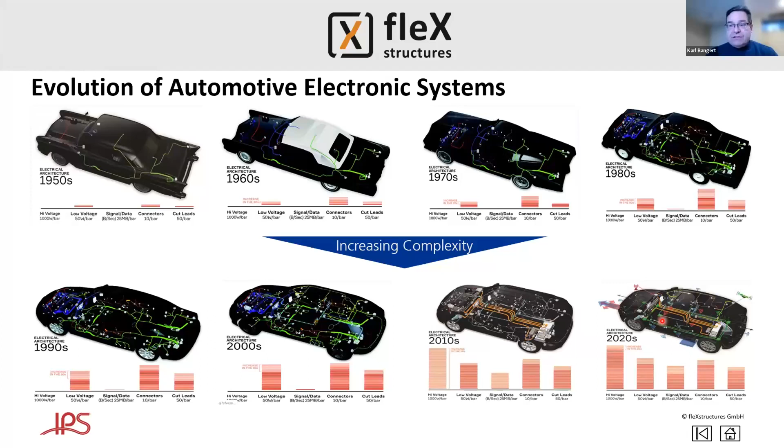And really the motivation for this, as you've seen if you're from the Southeast Michigan area, but really you're seeing this in products all around, is the advanced electrification and complexity of transportation systems. We've gone from a few feet of cable in cars to miles, actually miles of cable and wiring, along with an increase in the number of sensors and software needed to control these advanced vehicles. And as we move toward self-driving and so forth, it will only increase. The OEMs, as well as new upstarts in the electric vehicle market, are seeing this as the future. Everyone's in. Our Detroit 3, as well as companies throughout the world.

And this presents a challenge because managing this increased complexity is difficult if you wish to get vehicles out in a timely manner. So what we're going to discuss today is we're going to reference really some of the success that our clients have had in taking the traditional physical prototyping approach, where you've got to create a mock-up of assembly, let's say a front suspension of a car and the brake hoses and sensor cables and so forth, try to figure out where everything goes, and really get it to where these historical test labs are nearly empty, because you can do what you need to do in the virtual space, a combination of virtual product development together with

process virtualization. We have an example here of our good clients at BMW, who, in yellow, laid out some cables and hoses on a front suspension in 2015. And when they checked on what was rolling off the line, 3 years later, they were within millimeters of what they'd initially designed. This is a major accomplishment because there are so many variables, so many things that can change as you go along, that can lead to big problems as you get ready to assemble a product. And having these challenges in grasp this early in the product development cycle is a time and money savings.

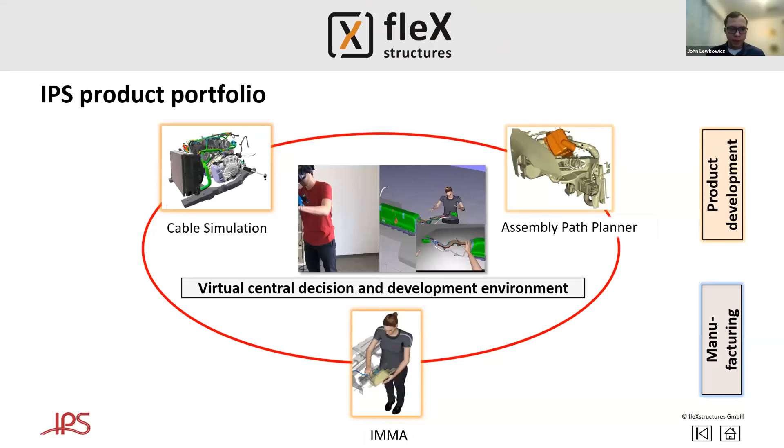And in the interest of bandwidth, I am going to turn off my video and share my screen.

All right. So beginning with cable simulation, we're going to go through a basic example here where we're going to try to analyze and optimize this brake line on this front corner suspension assembly here. As we go through this process, I do want you to keep in mind that this methodology and the way that the tools work really applies to any kind of flexible component. So whether that's a single wire, a multi-branch wire harness, a cable, a tube, even things like preformed cables. So if you have something that's pre-bent into some configuration, the methodology is really the same and applies to all flexible components.

So to begin here, we've just imported in some CAD data, either from our CAD system, or we have seen direct connections between PLM systems and IPS. So we've seen direct connections between Teamcenter as well as Creo View through Windchill if you're using the PTC solution. You can also just bring CAD in directly from your CAD system. So we're compatible with a number of different 3D CAD formats, including JT, CATIA formats, STL, and VRML. I would like to mention here as well that we do have the capability to import point cloud data into the system very easily. So if that is something that's of interest, it's very easily done in the IPS tool.

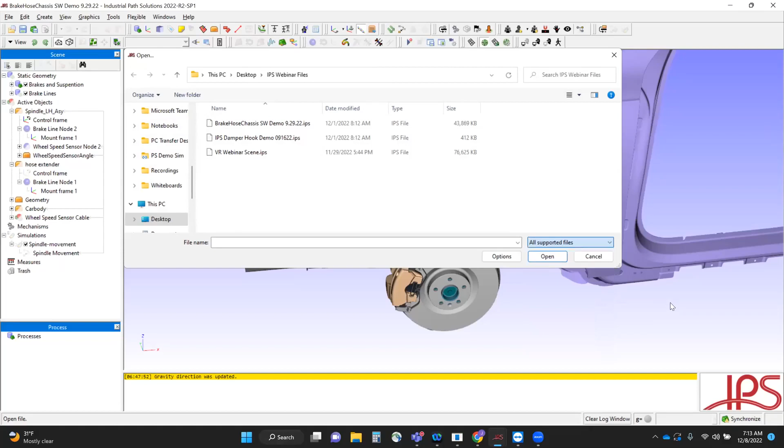All right, so we have imported in some data here. And we can directly design our flexibles in the IPS tool from scratch. Or if we already have some pre-existing CAD geometry, such as this brake line coming out of our CAD system, we can simply take this information, make this just dumb CAD flexible, do our analysis and optimization, and then at the end, we'll see how we can actually feed that data back into our CAD or PLM system.

So for our brake line here, I would like to make this cable flexible. So I'm just going to use a tool here called the Cable Finder to automatically find the geometry of this cable and make it flexible. So you can see the software very quickly has identified the center line as well as these cross sections going along the length of the brake line here.

Very important to note, again, that we can simulate straight cables. So basically anything that would be straight when unloaded, but we can also simulate preformed cables. So if you have something like a coolant tube or a rigid brake line or something that is pre-bent into some configuration prior to installation, we can also handle those kinds of flexibles as well.

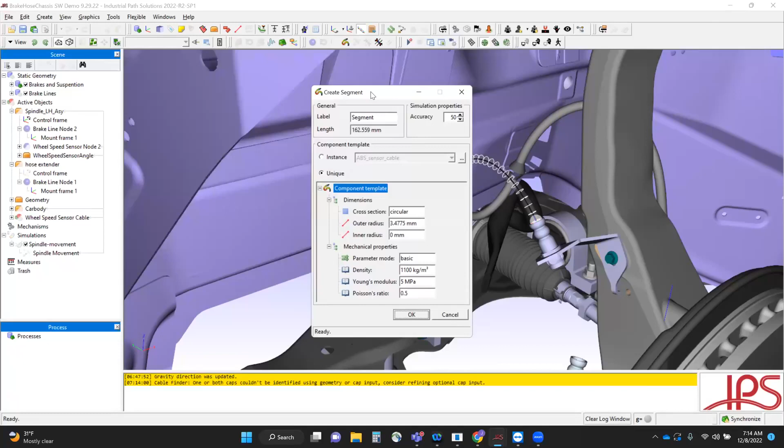Now, very importantly, we need to specify some of the material properties for this particular cable. So there's a few ways of doing this. We can directly input those values ourselves, or in this case, I'll just use the library of cables and hoses that comes with the IPS tool and identify this brake line as an 8mm brake hose. And I will hit OK. And we can see here that we have successfully created our flexible in IPS.

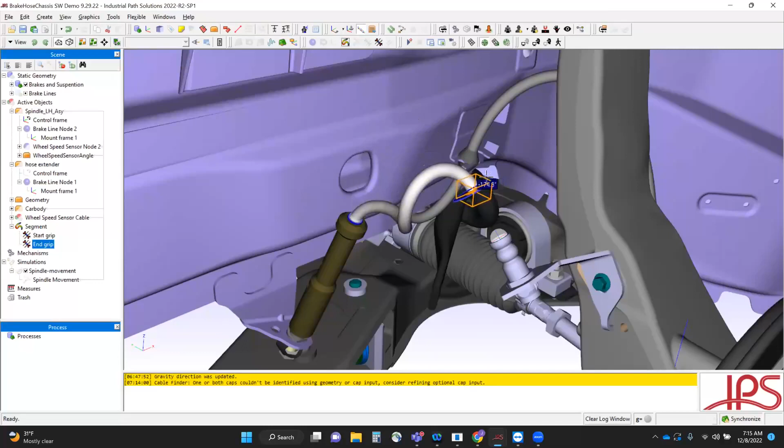Keep in mind that the software is very interactive and very fast. So as I move the end of the cable around, or if I were to apply some torsion to the end of this flexible, interestingly, we see that the cable is behaving based on its very specific material properties. So for this brake line in particular, it's very torsionally stiff. So if we apply torsion, the cable immediately goes into bending. So the software is highly, highly interactive and fast.

Now we do have a motion in here for our spindle assembly, our wheel assembly, and we can either directly create these motions in the IPS tool, or if we have some pre-existing motion coming out of our CAD system, we can absolutely import those things into IPS and link them together very easily. That would include things, even if it's a very complex, multi-link kinematic mechanism, the software can handle those as well.

So I'm just going to attach my cable to our spindle assembly here, and then just unwind it to make sure we're starting with a torsion-free solution. And if I play my motion again, we can see this cable moving along with our assembly. So beyond just being able to observe these things in the tool, we have a number of very powerful analysis and optimization tools built into the IPS suite.

So for instance, we could create a visualization on this cable, essentially a color map, right? And we can look at things like stripes to take a look at torsion in the cable. We can look at any number of different forces, moment stresses. But in this case, let's take a look at the bending radius. And then we can customize this color map for whatever our particular design requirements are.

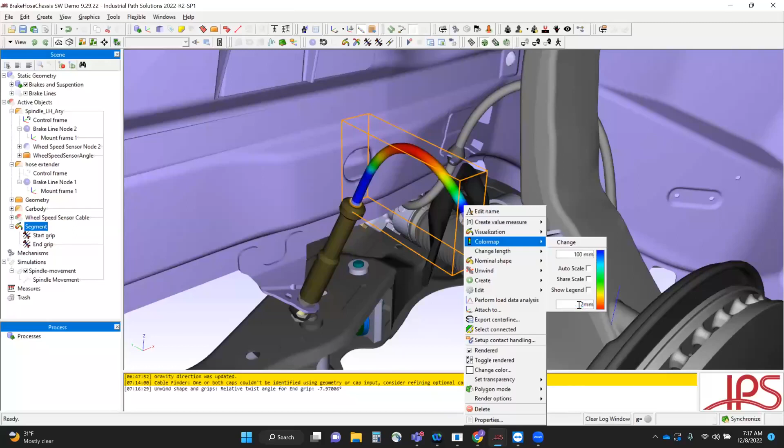So in this case, let's say that bending radius of 100 millimeters is really good. And our absolute minimum is a bending radius of 25 millimeters. If I play through the motion again, we can see this cable and this color map reacting in real time.

We can also directly take measurements of values on the cable. So I can create a value measure on this cable. Again, looking at things like elongation, contact forces, any number of different forces, moment stresses. And again, we'll just take a look at the bending radius here.

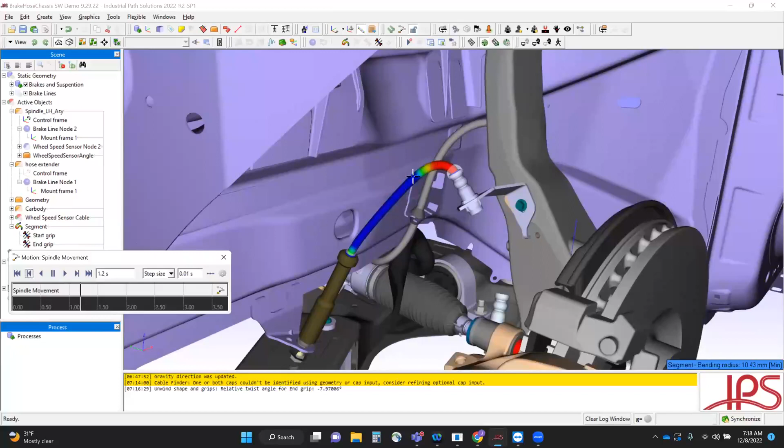1 second. So again, if I play through this motion, these values are tracked in real time, and we can directly observe those values in the bottom right-hand corner of the screen here. Now you'll notice it's pretty obvious that we're overstretching this cable, that it's far too short, and that this bending radius is going very low as the vehicle is in operation.

So in the IPS tool, we can very quickly and easily make changes to our flexible designs. For instance, I can very easily change the length of this flexible, right? Just with these up or down arrows, or I could type in some specific value, and we can see that this is improving our minimum bend radius condition here.

We also have a number of powerful analysis tools to actually look at how those values are behaving over the course of this motion. So I could create a plot here of my bending radius over time to see how those values are changing as the vehicle is in operation. So we can see that I now have a graph showing my bending radius, and I can drag through and see how those values are changing over time.

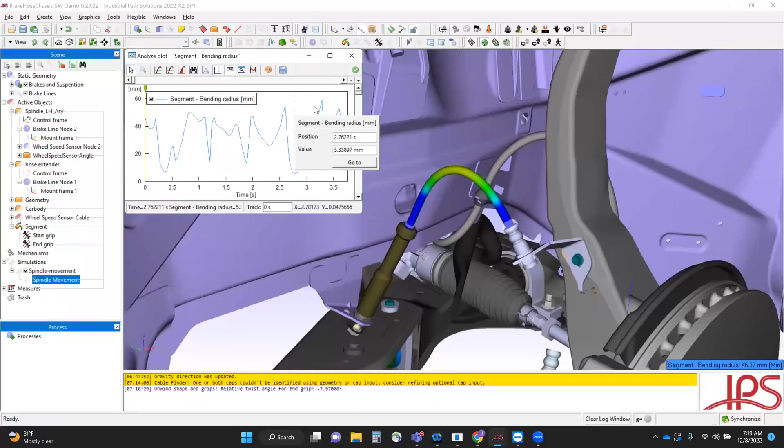We can also do things like search for global or local maxima and minima, or specific values. So in this case, we want to make sure we're staying above some minimum bending radius threshold. So I'm going to search for the global minimum bending radius. And if I click find, we can see that the software has identified this exact point for us on the graph. We can see when this is occurring, and that our absolute minimum bending radius value is about 5.3 millimeters. So that is very well below our design requirement of a minimum of 25 millimeters.

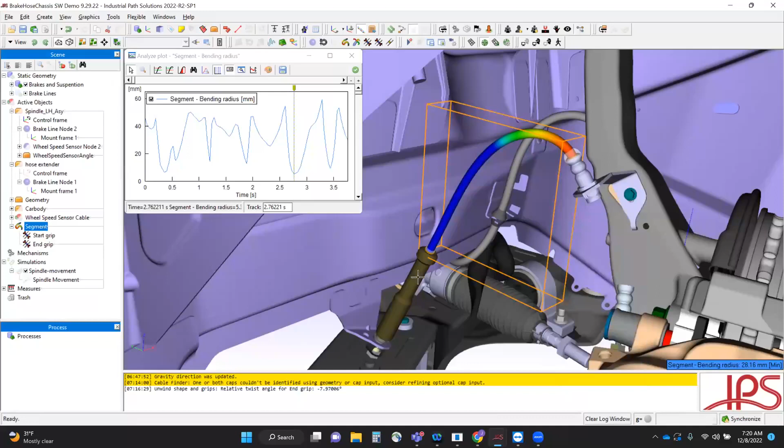And I can jump the simulation directly to that point. And now if I optimize in this very worst case scenario, we should be able to be confident that our cable is going to stay above that value throughout the entire motion. So to do so, I'm just going to right click and change the length of the cable. And again, we can see that value changing in the bottom right-hand corner of the screen. So let's get above. At about a length of around 220 millimeters, our minimum bending radius in this very worst case scenario is above our minimum of 25. So if we like these changes that we've made, I can just click this green check mark, and those changes will be saved in the simulation.

Now playing back through my motion, we can see that this longer length has improved our bending radius, but this could also create some other concerns, right? So this increase in length may have reduced some of our clearances to some other surrounding components. So we can also take a look at things like distance measures between cables or rigid bodies in the software.

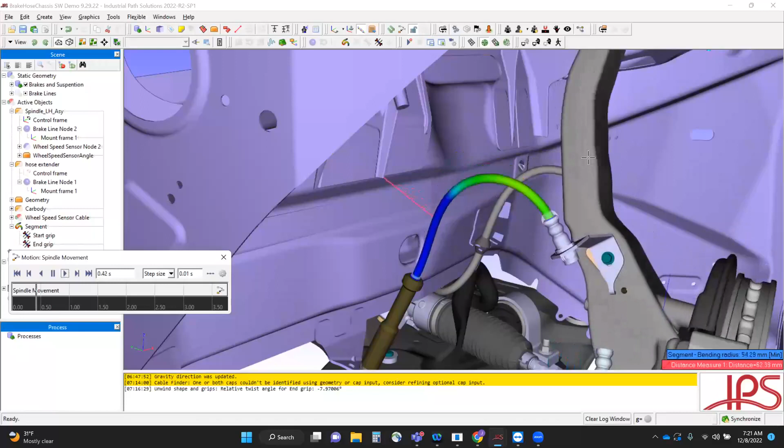So for instance, if I were concerned about my clearance from our brake line here to, let's say, this piece of geometry, I can create a distance measure and just tell the software what I want it to measure from and what I want it to measure to. So in this case, this component here. And again, all of these values that we're tracking will show up in the bottom right-hand corner of the screen here, and they are all tracked in real time, very interactively as we make changes to our routings and our designs.

Similar to what we did for the bending radius, we can create an analysis, a plot of both of these values now. So our distance as well as our bending radius, to make sure that whatever our design criteria are, they're being met. So now we'll have two plots here. And firstly, I want to make sure that my bending radius is staying above that minimum value. So I'll just search for the global minimum. Find that point. We can see our very worst case bending radius is above our minimum. So that's good.

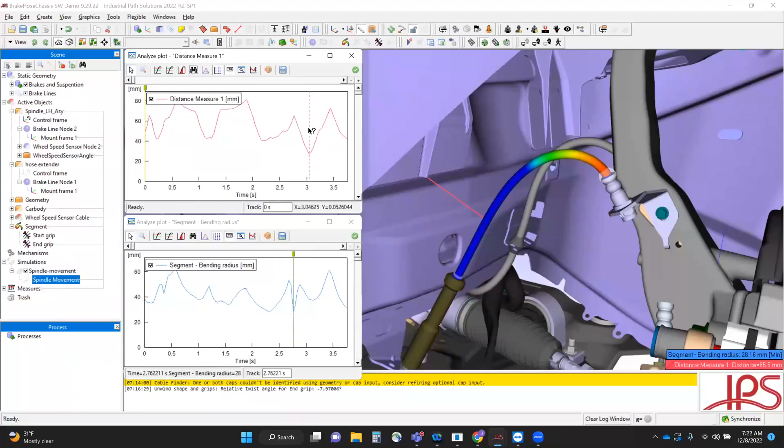And now let me take a look at the distance measure. And this is going to be our very worst case clearance condition. So if I jump to that point, we can see that's a value of about 27 millimeters. And in this case, that should be plenty of clearance. So we can conclude that we have successfully optimized our brake line here.

Now the question is, what do we do with this information? So we've done some work, some design work in IPS. And obviously, we want to feed this information back to other designers, back into our CAD or PLM system, so that everyone can utilize this design. So we have several ways of doing this in IPS. Firstly, we are able to just export the center line of this cable. So again, we can send that out of the software in IGES, CGR, JT, STL, or VRML formats.

We could also capture the 3D geometry of this cable in some particular static position. And we also have the capability to create motion volumes, right? So actually capturing all of the design space that this cable is going to move through as the vehicle is in operation.

So if we create a motion volume here, I just need to tell the software what I want it to track over the motion. So I just want to take a look at my one cable here. And then I'm going to change my settings a bit in the interest of time. And this again will generate a swept volume that's going to capture all of the design space that the cable is passing through. And we can export it out in any of those formats mentioned previously, so that you can bring it back into your CAD or PLM system and really allocate that design space.

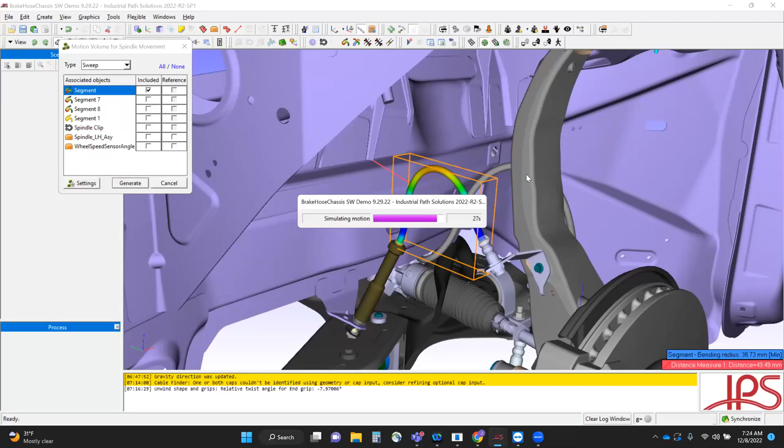So we can see our motion volume here. And I'm just going to change the color and transparency a bit so we can take a look at how our cable is moving through this space. So very easy to feed these changes back to any other systems you may be using.

Another thing that's very interesting here is thus far we've been really taking a look at this cable with all of its nominal characteristics, right? So we're looking at it with the nominal length, nominal fixation points, nominal material properties, but we can also allow any of those things to vary in the tool and create tolerance envelopes that show how any of that variance would affect the design.

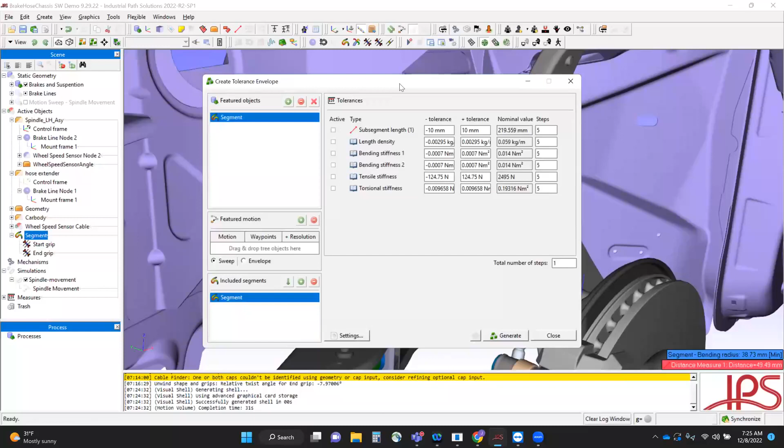So I'm going to pull up the tolerance envelope tool here. And you can see that we can allow any number of things to vary. So we could allow the fixation points to vary either in position or orientation, length, material properties, and we can do this with or without a motion.

So just as a simple example, if I were to allow this cable here to vary in length, let's say plus or minus 10 millimeters, I can generate this volume and you can see all of that design space captured. And again, we can very easily export these things out to feed them back into any other systems that they may be needed in. And that concludes the cable simulation portion of the demonstration.

Great, thank you very much for that, John. That is impressive, especially being able, as you mentioned, to take the CAD data that you've used in IPS, bring it back into your CAD system as part of the product development workflow. A couple of questions have come up. You'd mentioned cable and hose properties. How are these determined? Is there a library of data that you may be able to reference?

Yeah, absolutely. Great question. So the tool does come with a library of predefined cables and hoses that you're more than welcome to use. And there are several other ways we can define material properties in IPS. So we can use basic parameters, right, which would just be density, Young's modulus, Poisson ratio. And this assumes basically a homogeneous material throughout your flexible. We also offer through our partners in Germany testing services. So they've developed a tool called the Mesomics test bench.

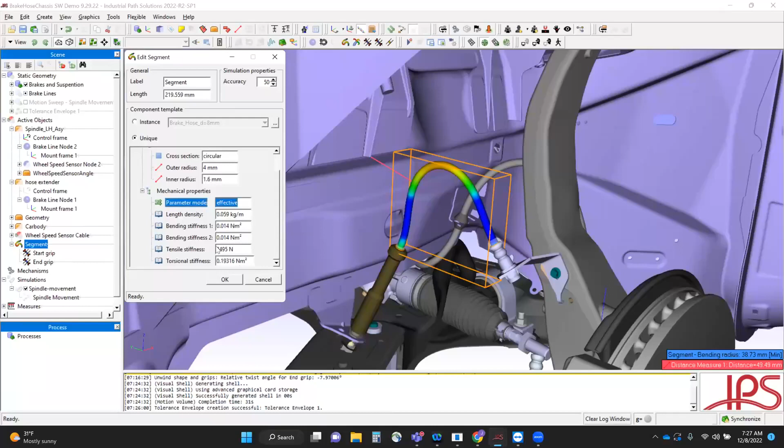In many cases, these basic parameters are plenty good for getting an idea of how your flexible is going to behave. But if you're doing a really critical application and you need a really in-depth look at internal forces, just a more robust study, we can send those flexibles out for testing to determine exactly what these effective material parameters are through our partners in Germany.

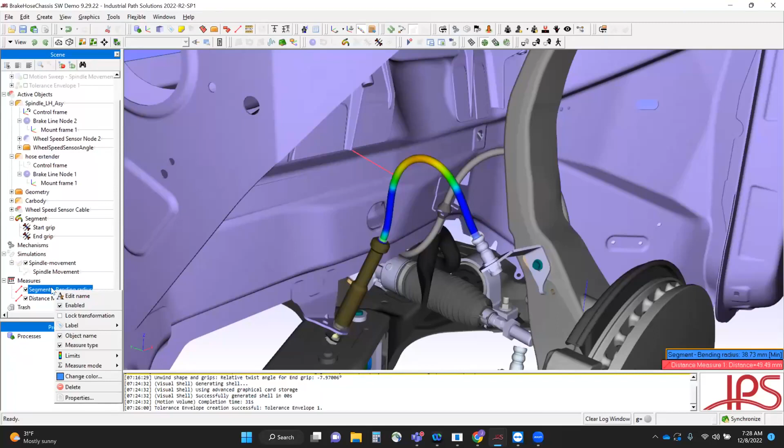Great, thanks, John. Another question has come in as to, is there a force element as an output to understand how much force is acting on the cable? You've identified a number of measures. Yes, please go on. Absolutely, yes. So any of these value measures that we've created, which keep in mind, there's a wide variety that we can track on the cable, we can absolutely output those and send that data into some other system by creating one of those analysis plots, right?

So if I create a plot, let's say for my bending radius, just as an example, I could send that information out either just as the graph in an image format, or we also have the ability to save this out in a CSV file that could then be used in any other engineering tools you may want to bring that data into.

That's great, John. And when you say the force, that's forces on the cables as well as on the connectors or fittings or what have you, right? Yes, absolutely.

Great. Well, with that, I think it looks like we're wrapped up with the cable simulation portion. I'll keep the mic on you, the spotlight on you to talk about path planning. Awesome. Thanks, Carl.

Yeah, so moving on to the Path Planner tool in the IPS toolkit. This is a solution that allows us to find collision-free installation paths for essentially anything. So those could be components in assembly. They could be pieces of tooling. So in this case, we're going to take a look at this damper, this hook style lift assist that's trying to pick this engine damper out of a dunnage tray.

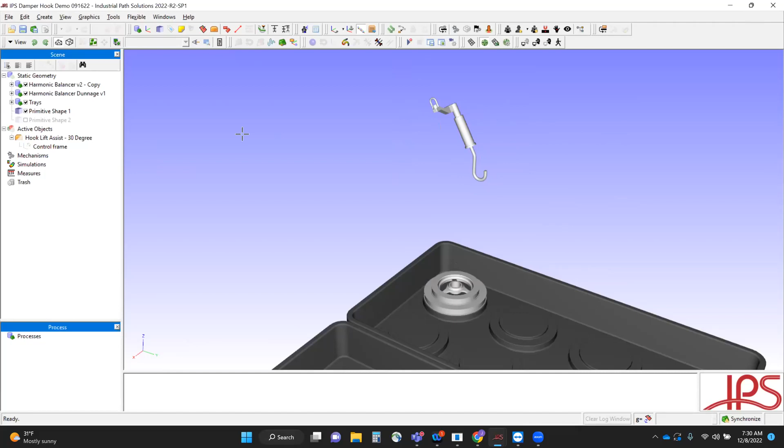But if you have something and you want to find a collision-free path from position A to position B, the software can absolutely do that for you. It is extremely easy to use. Essentially, we just tell the software where to start, where to end, and what to avoid on its way from point A to point B, and the software will do the rest.

So if I select my damper hook, and I'm just going to open up the rigid body path planning tool, I'll set this position as the start, and then I'm going to jump my hook into the final position, where it's actually hooked into this spoke on the damper, which is where we'll begin pulling it out of the tray. And I can set that position as my goal.

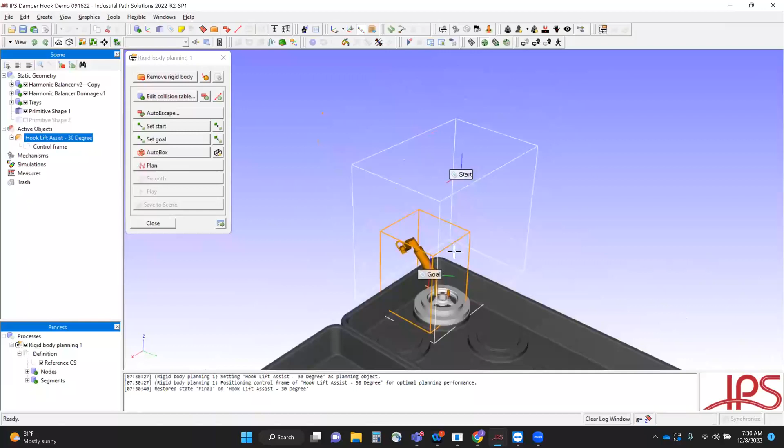Give the software an area to try to find a collision-free solution in. So you can see this box here that it's identified for me automatically. And then just click plan. And the calculation times can vary depending on the complexity of the installation path and how small the clearances are. But you can see that the software just found this installation path in about 6 seconds.

So this is a very unique tool, very different from other simulation tools we see, where you have to manually manipulate each of the points along this installation path. So IPS is going to do all of this automatically for you. So now if I open up my motion here, and I'll slow it down a bit and click play, we can see our hook moving from that initial position into the final position.

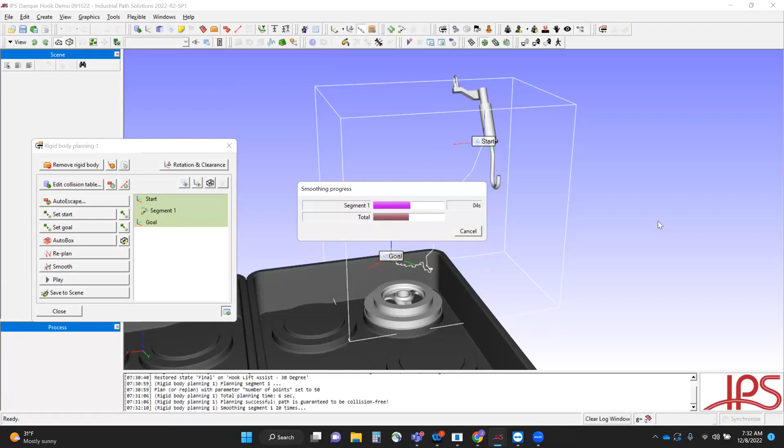Now, one thing you may note here is that this path looks quite unrealistic to how an operator may perform this task. But keep in mind that this is just the initial solution. So within the Path Planner tool, I can smooth this motion. So let's say I'll smooth it 20 times to create a more realistic installation path that can then be used in conjunction with our IMMA, our dynamic human modeling tool.

So if I open my motion up again here and I'll slow it down, we'll see a much smoother, more realistic installation, similar to how an operator would probably actually perform this task. And again, this is all done automatically and very quickly.

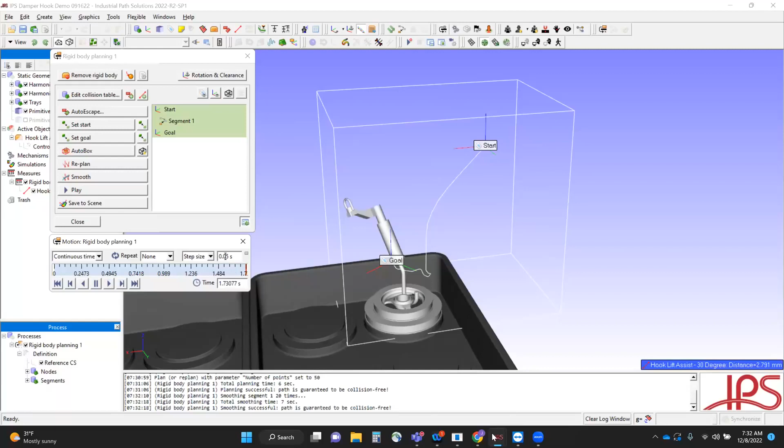One other thing I'd like to mention here is that we also have the ability to create things like collision tests and distance measures. So I'll create a distance measure here, and we'll see our minimal distance tracked in real time, just as all of our other value measures were for the cable simulation. And we can see what that minimal clearance value is throughout the entire motion.

Once I'm happy with the path that I've created, all I have to do is click Save to Scene. And now this installation path is available to use with any of the other simulation tools in the IPS suite. And that concludes the Path Planner portion of the demonstration. It's quite simple to use.

Thank you, John. Hey, we have a question from our participants, which is how can I exclude parts within the Path Planner that are barely touching? You mentioned collision detection. Yeah. So there's a few ways to do this. If you are actually in collision in your final position, right, your final installation position, there is a tool built right into the rigid body Path Planner that is called Auto Escape.

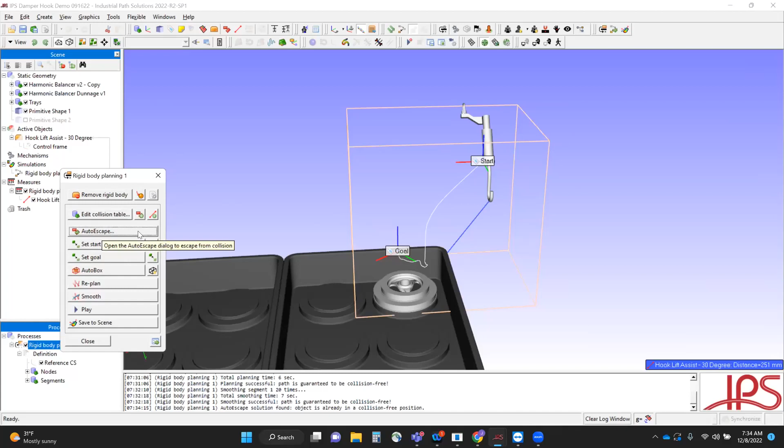So you can use this to try to find a position where it's just barely out of collision to get your final installation position. The other thing we'll often do is just kind of barely pull it out of collision, right? So we could look at something like this distance measure and use that to get an idea of how close we are to some other component.

Or let me open this back up. We can very easily create a collision test. So you can see that also popped up in the bottom right-hand corner of the screen. And then this will identify when we are in collision with these components. And there are a couple of different settings for this. So let me just edit my collision test. Right now, it's just highlighting anything that's in collision.

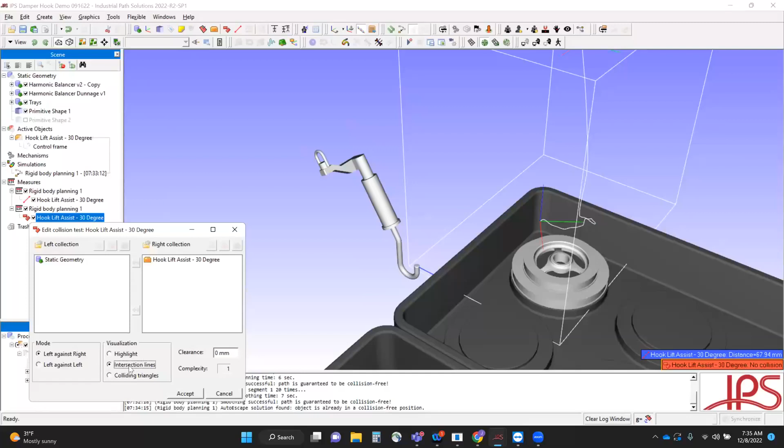But what may be more interesting is we can take a look at intersection lines or colliding triangles, which will give you a really good idea of where it's actually colliding. So let me change the transparency on this tray so we can get a better sense. And you can see where that collision is occurring exactly. So if we had two components that were barely in collision, we can use these tools to identify where that's actually occurring and try to move it into a position where it's just barely not touching.

I should mention here also, this is an interesting feature. You can also capture this geometry just by right-clicking on the collision test. And now I've captured these lines of where this collision is occurring, so we can export this out and feed it back into like a CAD system or somewhere else that this information may be useful.

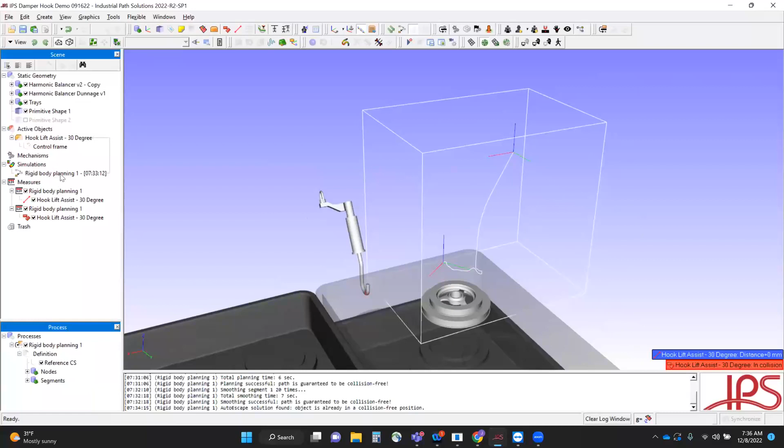Great, John. It looks like that provides a lot of information that is actionable for solving a problem like this. Another question that's come in is: we're working with tooling, but what if we wanted to install the damper on a vehicle, or if we wanted to find a path that the trolley with the dunnages is going to take through a plant floor? Are those all things that can be analyzed with Path Planner?

Absolutely. So any two components or any two objects, items, if you want, just going from point A to point B, the software will find a solution to get between those. And the other thing to mention here is that we have a very wide array of settings and options within the tool to really optimize whatever our path is. So we can tell the software to prioritize avoiding obstacles or trying to find a very short path. We can have it prioritize rotation or translation.

And we can even do things like constrain the path along certain axes, right? So in the example you provided with a trolley, we would constrain that to the floor plane, the XY plane, and not allow it to move in Z. And the software would absolutely find a path along the floor from point A to point B.

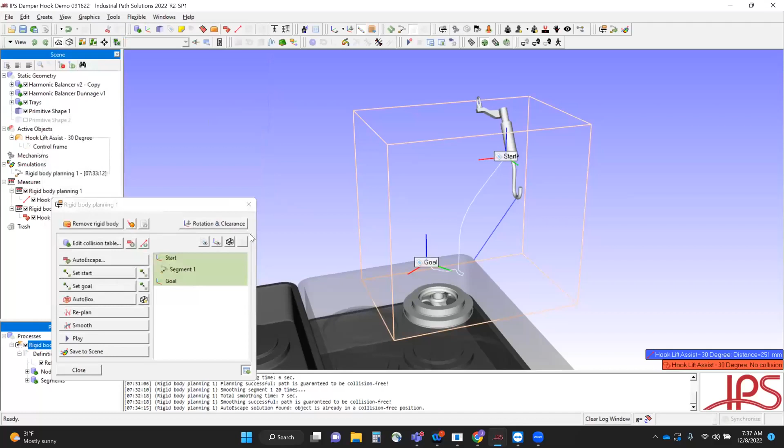Excellent, very good. And I see another question: what if it can't be done? How does Path Planner handle unsolvable paths? Yes, so that is a great question. Typically, I'll allow the software to run for maybe a minute, and if it doesn't find a solution, I can increase the calculation time to allow it to run for as long as it is required to find the path. So very worst case, you could allow it to run for a few hours while you go and work on something else.

But I will say that it will not necessarily tell you that you cannot go along some path or that no installation is possible whatsoever, simply due to the fact that there are an infinite number of potential paths to try, right? But for instance, if we were to take a look at a plot of our clearances here between the hook and the damper, we're talking about sub-millimeter clearances on this installation path that it found in 7 seconds.

So if the tool is really struggling for a long time to find a path, if it were feasible, it's going to be such minimal clearances that it's probably not realistic, right? So if there is a way to get from point A to point B, the tool will find it. If there is not, it will not explicitly tell you that, but you can sort of infer based on the amount of calculation time.

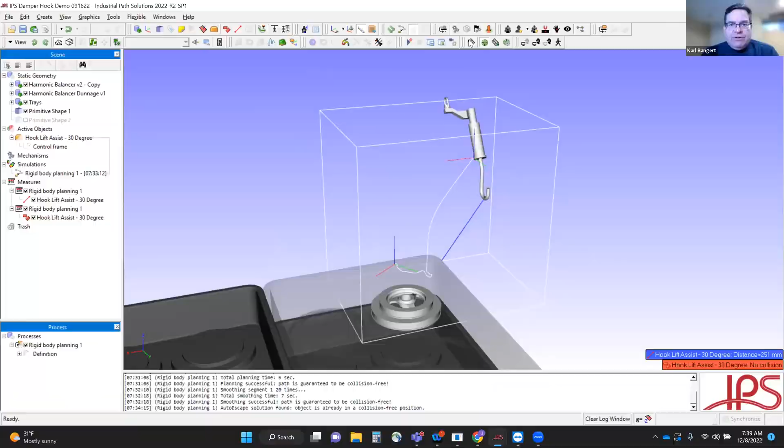Great, thanks a lot, John. With that, I'll turn the mic over to Karl to talk about IMMA, our intelligently moving manikin, and how that fits into what we're doing with process virtualization and ergonomics.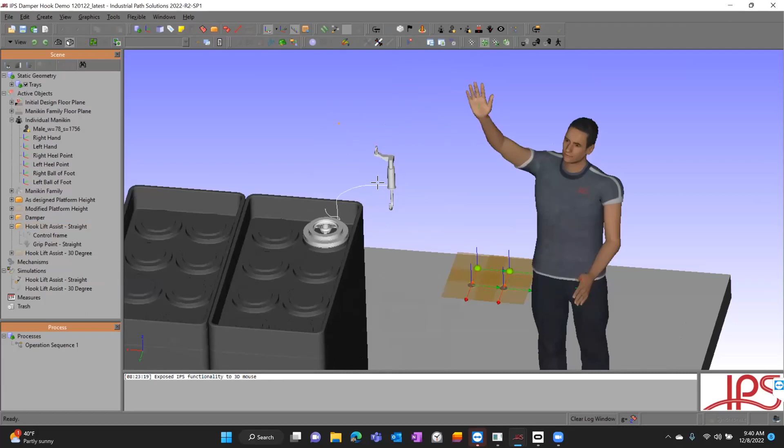So what we have here is a module that's called IMMA, and really the purpose of IMMA is to consider the human element during various installation paths. So in this case, what I've done is I've basically directly imported the motion that John was able to plot using the rigid body path planner for this hook. And now we want to evaluate the effectiveness of a human's ability to basically perform that installation.

So creating a human in the IPS software just involves importing one from this manikin family window. So you can import what's called a manikin family, which is a series of mannequins. This is useful in evaluating smaller mannequins all the way up to larger ones simultaneously. But in a lot of cases, you may just want to consider a single individual manikin, depending.

So there's a data set that you would select from. So you can pick from ANSUR or IFPS that are included in the software package. Define a sex for your mannequin, and then also define the body mass in kilograms or stature as either a value or percentile. So for the purposes of this demo, I've just quickly imported a male here of 50th percentile weight and height, just to give me a general representation to start with.

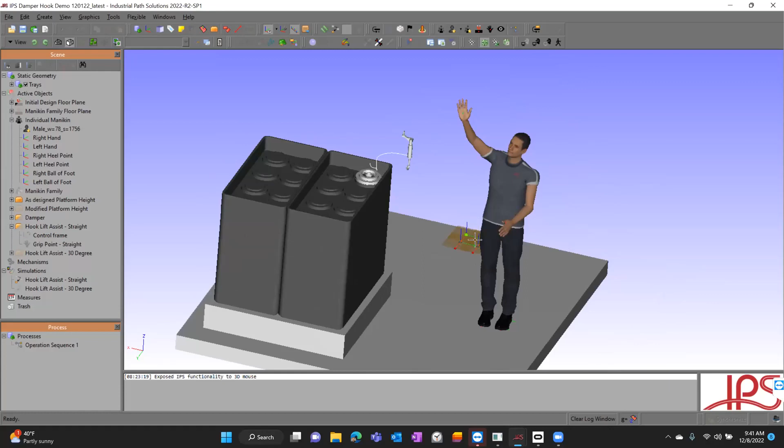And so I think what's really interesting about IMMA is that it may almost be considered an add-on module to the rest of the IPS suite. So this human is designed to interact really nicely with all of the other useful components, the analysis tools that John has already showcased. It's a very fast and efficient way of defining essentially parameters that the mannequin has to operate within. And then you can evaluate whether or not there's going to be a likelihood of success with, again, considering the human.

So if we take a look at our mannequin in the scene tree over here, we can see that the first constraint is that they're connected to a floor plane. And if we query the floor plane constraints, we'll see that the mannequin's allowed to translate infinitely along the X and Y axes, but is not allowed to translate up in Z. And that makes sense. In this scenario, they can walk freely around the workspace, but obviously we don't want them to translate up in the Z plane.

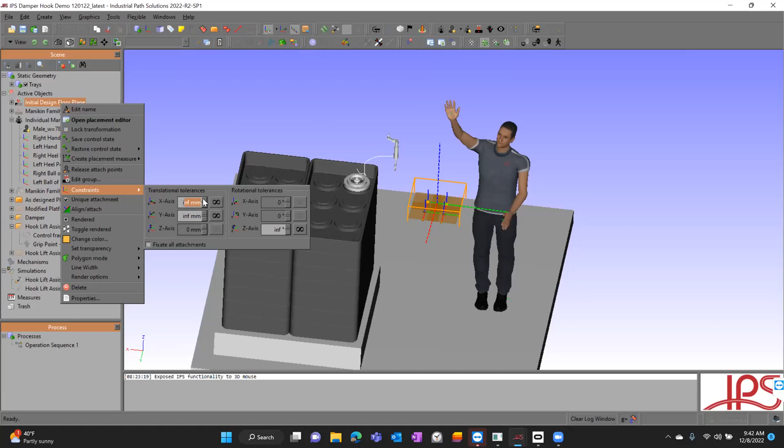If we know and want to constrain a workstation pitch, we can define those characteristics. So for now, I've just gone ahead and defined a 500 millimeter by 500 millimeter workstation pitch. And you'll see that the mannequin already hopped to be located within those constraints. If I move the workstation pitch within my mannequin's base of support, they won't move because there's no need to. And then as soon as the mannequin observes that, hey, I'm outside that range that was defined for me, they're going to go ahead and adapt accordingly.

So now the mannequin is located nicely in the workstation pitch right in front of where I'd like to see them operate. And so now I can begin to have them perform the task. A lot of typical digital human modeling tools will require manual manipulation of various joints or motions, things like that. The way that IPS takes an approach to that is pretty unique, and I'll show that in just a minute.

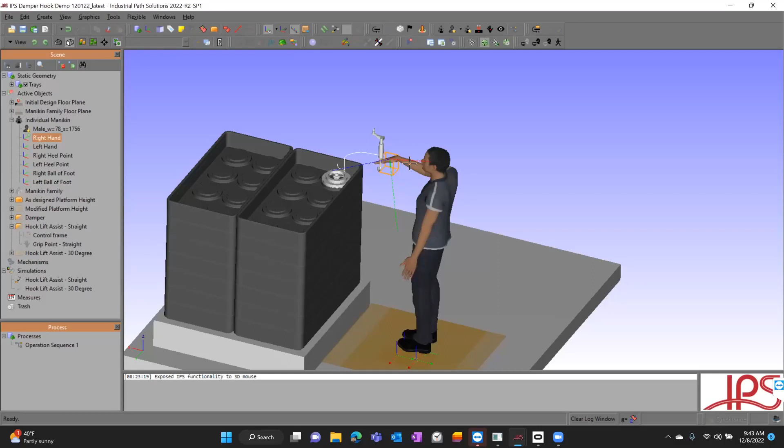So as I was going to get him to reach up here, we can see that immediately the mannequin is able to pass through some geometry. And it's pretty easy for us to constrain that. What we do is we go into the mannequin menu and enable what's called collision avoidance. We can then define, much like the other modules in the path planner, the geometry of concern. So I want to make sure that my mannequin is not going to pass through any of this highlighted geometry, and I can select OK and continue moving forward.

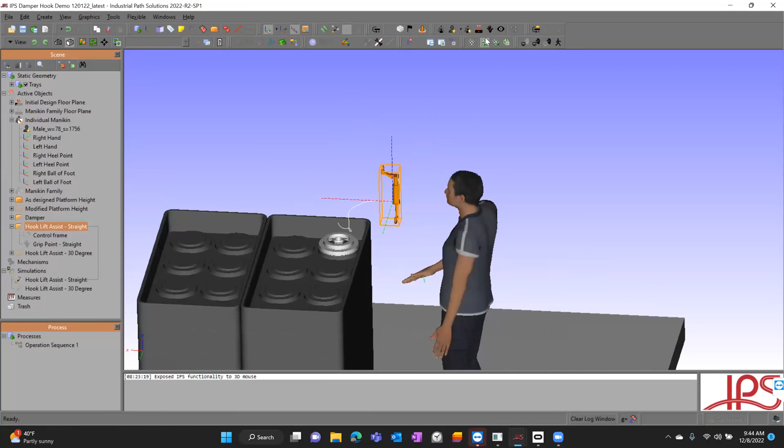So to essentially ask my mannequin to perform this task, it's pretty straightforward. I'm going to select the item in the window here, and then I'm going to add what's called a grip point to that object. As soon as I query this grip point menu, I'll see a representation of the target location for my mannequin's hand, in the hand style that you select. So whether that's a right-handed or a left-handed grip. In this case, I think a right-handed grip is most appropriate.

And then I can begin manipulating my hand until I find that it's a pretty reasonable position for them to be grasping. And that looks quite good there. Now I get the opportunity to define a specific type of grip. And so much like the cable sim, there is a library that you can pick from of predefined hand postures that could be useful for different tasks.

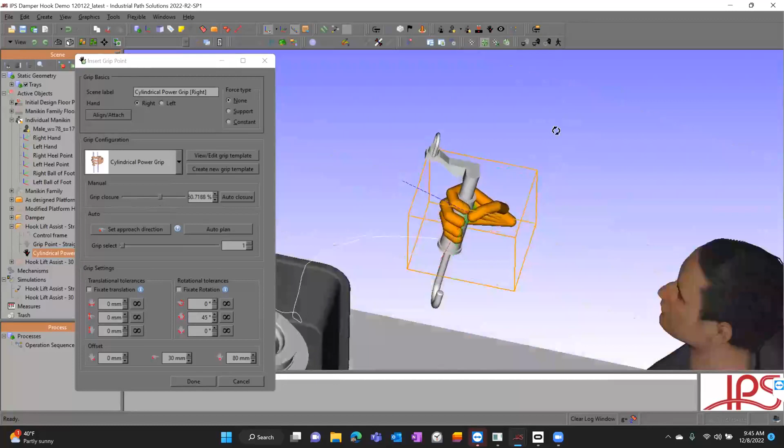So if it's a wiring connector, you may want to look at the tip pinch. So if I select that, you can see how the posture of that target hand changes. But for this task, I think a cylindrical power grip seems most appropriate. And you can see that actually looks quite good. And now I have the ability to either expand or close my grip, again, just for the sake of clearance and realism. And I think that positioning there looks quite good.

In the sake of, again, defining parameters that the mannequin needs to operate within, there are grip settings that also allow for tolerancing. So in this case, I think the mannequin can comfortably tolerate about 20 millimeters up and down the vertical length of this tool. They can position their hand anywhere they'd select along this length here. So I'll give them some translational tolerance in this direction, and then I'll give them a little bit of rotational tolerance as well, just to ease the calculation.

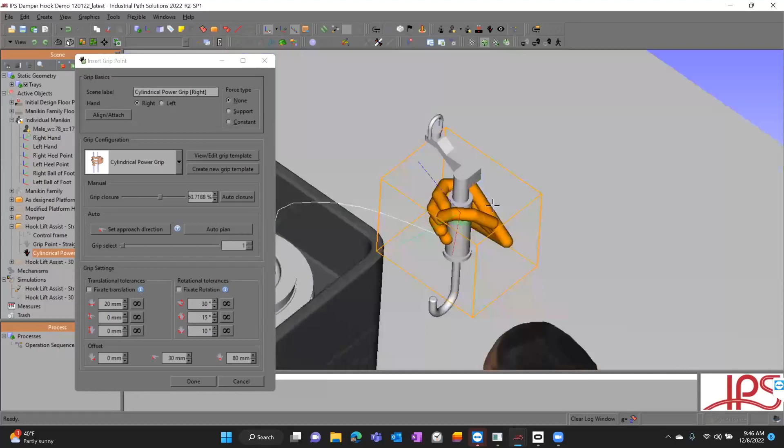And I think it's reasonable that a mannequin can flex or extend or deviate in some capacity from this exact target. But if the intent is that this is the exact target, you can set all these values to 0, and then the mannequin will have to achieve this very specific orientation on the task. So once I'm comfortable with the positioning of my grip point, I'm just going to select done, and then I'm going to drag and drop that onto my mannequin. They will then reach up and grasp that target location, and it's confirmed that they can reach it by this small little green dot here on the grip point itself.

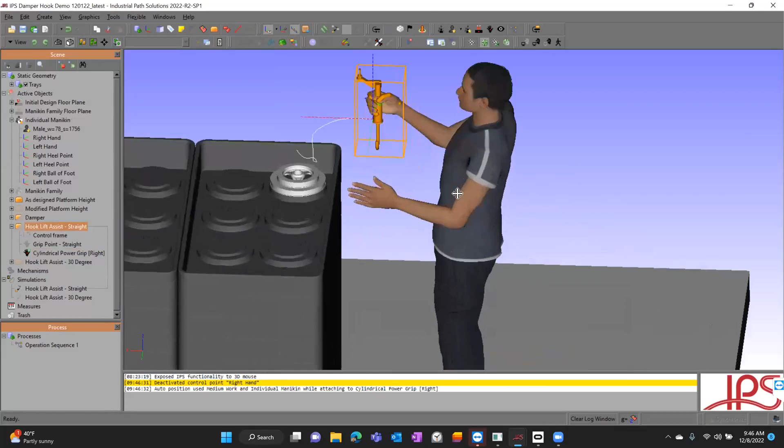And since my grip point is actually nested in the tree structure here, my grip point exists underneath this object here. Since John's gone ahead and plotted a path for that object, it's pretty easy. The grip point is going to follow the length of that route that's already been plotted. So if I go ahead and select play here, you'll see that my mannequin's trying to follow that path. If I pause it right about here, you'll see that the icon for my grip point's actually changed. It's no longer green. It's now displaying as this red with a cross-hatched line through it.

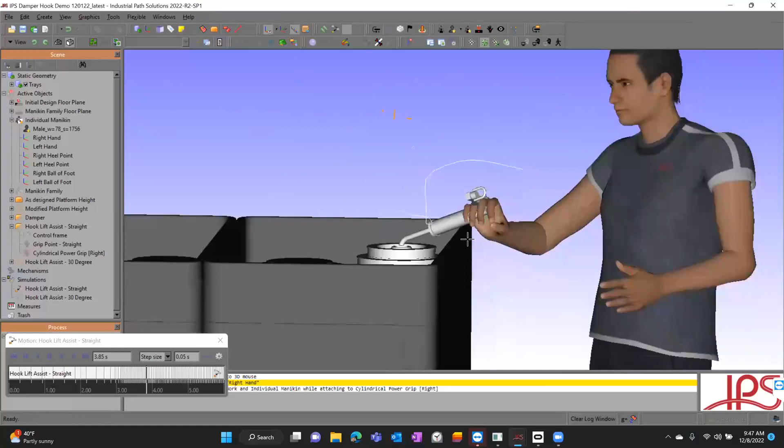And basically what that's telling me is that, based on the constraints that I've set, constraint to the floor plane, collision avoidance with this CAD geometry, and the tolerancing that he's been allowed to deviate from this grip point, all of that considered, he's been unable to find a successful path to maintain that grip. And you can pretty clearly see why, right? If I render this, you can see that there's essentially no tolerance for a human hand to be able to achieve this task while still maintaining a cylindrical power grip on this tool.

And so one of the ways that we can quickly validate design changes is by simply swapping this tool and swapping the grip point. And so we'll do that right now. I'm going to go ahead and release my grip from this tool. I'm going to hide this tool. And I'm going to bring up the proposed design change. And what that looks like here is a tool that's got a 30-degree bend in the actual hook mechanism. And what that should allow us to do is to grant a little bit of a better clearance to the actual geometry around it.

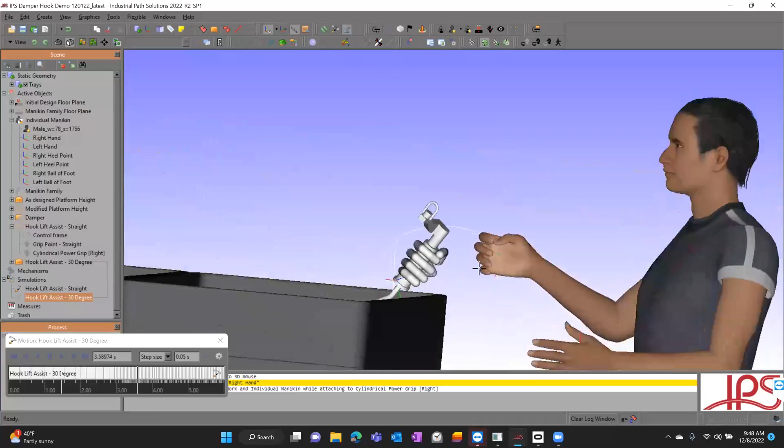You can see that as I play through that same motion that would have also been created using a path planner, there's much greater clearance between this part and the surrounding geometry. So if I bring that back to its initial position, I grab my grip point and I attach my mannequin to my new grip point. You'll see that it's confirmed they can reach the target location in its base state. And now I'll simply play through this motion and observe to confirm that this is a successful path throughout the motion.

And you can see that pretty clearly. The motion's unchanged. He's demonstrating pretty clear clearance to all of these CAD geometries. And so this is a successful redesign, in my opinion.

Another thing that we can do is using IMMA, we can get a good understanding of what the mannequin is able to observe through the course of their task assignments. And so we can do that through the use of what are called viewpoints. So again, I'm going to select my tool. I'm going to select this icon up here, this eyeball. And what that's going to do is it's going to release a viewpoint in the location of my tool.

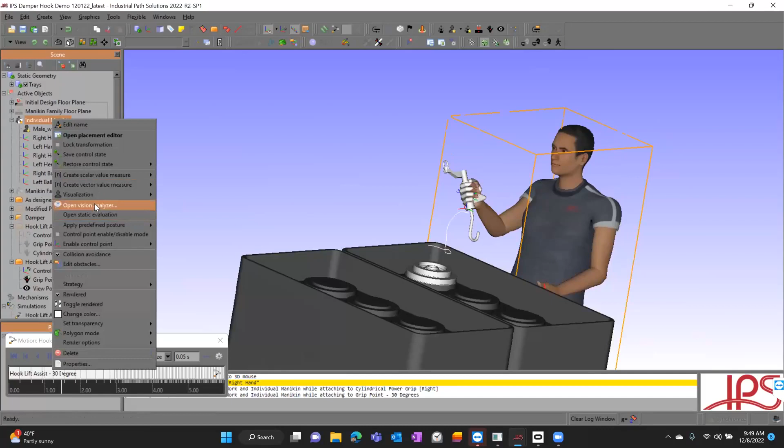What I'll do beforehand, I will bring up what's called the vision analyzer and bring up a window so that you can essentially see exactly what the mannequin sees. So you see that there is this view window. They're sort of looking off in space. And again, playing through that motion, we want them to actually target this location on the tool.

So it's as simple as dragging and dropping that viewpoint onto my mannequin. And you can see that my vision camera has updated. I may just quickly hide my grip so you can see the mannequin's hand a little bit more clearly. And again, as you drag through this motion, you can see exactly what they see.

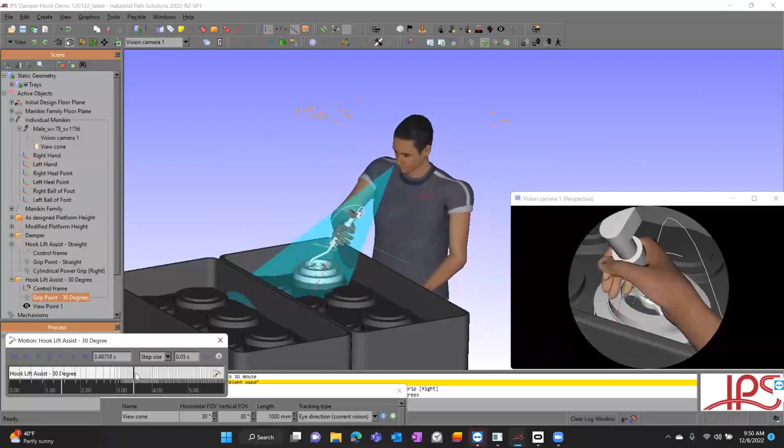So you may want to consider adjusting the grip point and producing recommendations based on, hey, it seems that they may have difficulty spotting this based on how they've initially selected the grip. And this can also release new ideas for product or design changes.

Another really neat feature about IMMA is the ability to assess from an ergonomics perspective how difficult some task or assembly may be. And that can be done by opening what's called the static evaluation. So we can see here that based on the current posture that he's in, it gives me an output for essentially the estimated level of risk given the postures that he's assuming.

So there is a biomechanical model behind IMMA, consisting of a series of joints and segments. I believe it's 84, but I can confirm that. And each one of the joints and segments is being monitored in real time, much like the other components of IPS. And you can query this and quickly identify that the arm and wrist are at the greatest risk, and the overall score for the task is a level 4.

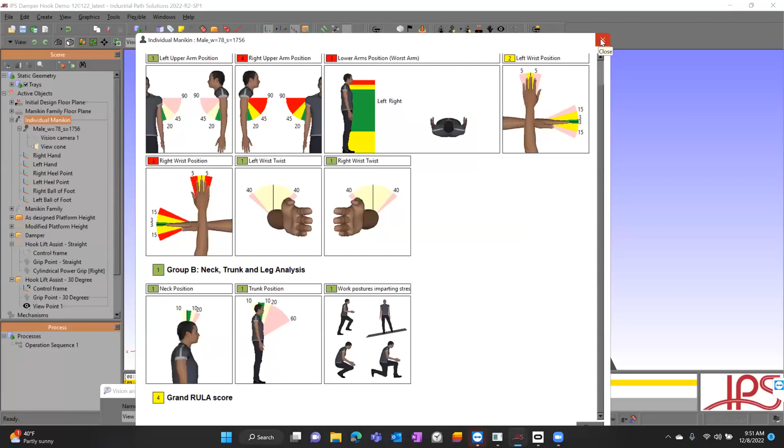So if it's a level 4 for say a 50th percentile male, we may want to do some further investigation and confirm that this task would be viable for, say, a smaller, shorter female. And so we can do that by hiding my male mannequin and releasing the grips and resetting my simulation. There we go. And what I'd like to do now is quickly bring up a manikin family.

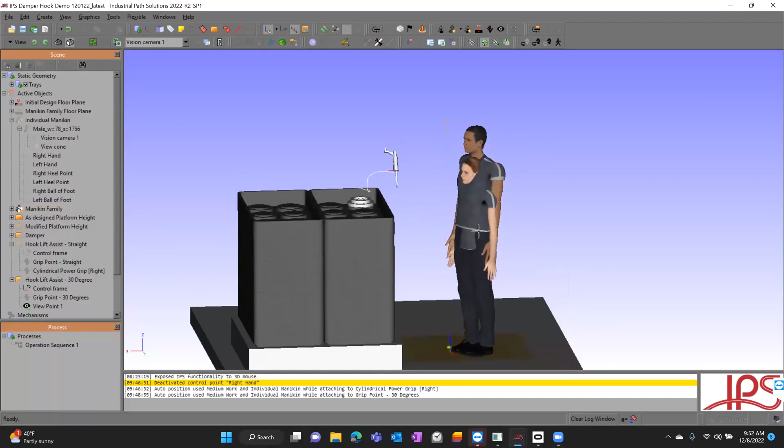So a manikin family can consist of any number of mannequins. In this case, I've selected 2. I've got a smaller female and a taller male. So this should give me a good indication of basically the level of risk associated for a population ranging from small to large.

So what I can do here is, similarly as I did with the individual mannequin, I can look at my lift assist, look at the grip point that's embedded behind it, and just drag and drop that onto my family. We can see that in the start position, it is green, so it looks good. So that means in the start position, there's no issue with the mannequins reaching that point. And we can then go ahead and play through this motion.

It actually stayed green through the whole time, so that looks good. That means the outer perimeter of this task looks quite good. One other thing that we might want to consider is that at certain points in time, they will need to reach to parts on the inside of the bin. And so we can look at that as well.

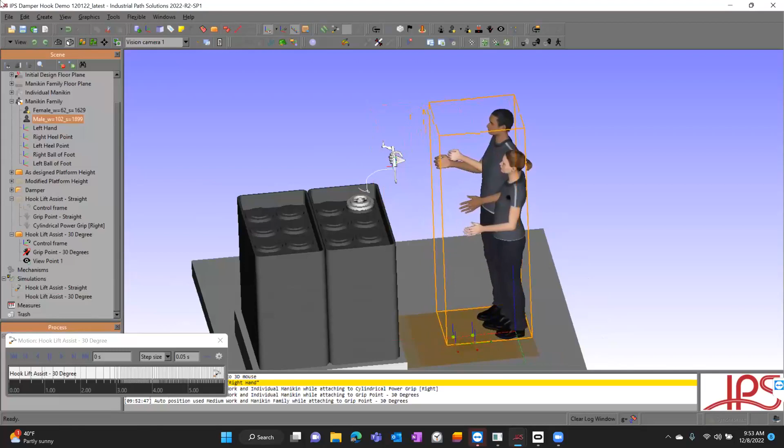So if I move my mannequins back a little bit and go ahead and change the position of my trays, and then basically reattach my mannequins to that grip point, I'll be able to play through this motion and see, using the collision avoidance, are my mannequins able to successfully reach that? Go through and play. We do observe that at a certain point in time this is going red.

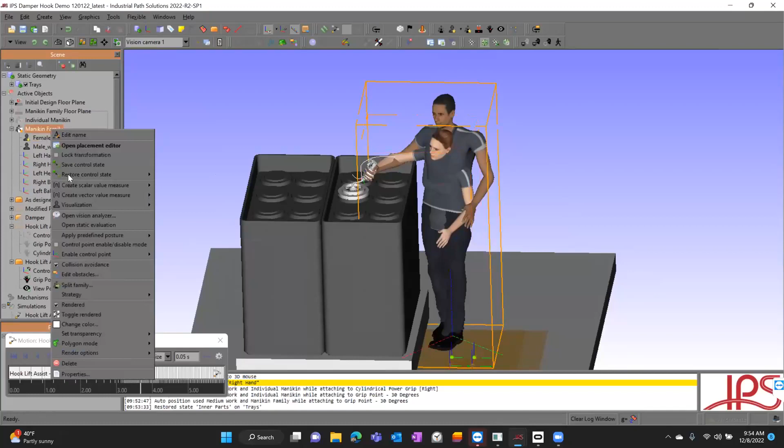So it's brief there, but you can see that the mannequins will have a difficult time reaching this if they are smaller. You can see that their posture is a little bit compromised. And we can again open that evaluation and see, based on the range of mannequins that are located in our sim, we can see that the grand score is actually significantly more red for the smaller female than it is

for the taller male. So one thing that we might want to consider doing is either reducing the complexity, the number of trays that would be included in this so that the mannequin doesn't have to reach as high. Alternatively, we could look at doing something like raising the floor plane up.

So if in real time I bring this floor plane up, what we can do is then again query that family, open the static evaluator, and confirm that this has significantly reduced the risk. And it's gone from that sort of dark red maroon high risk state up to this, from a posture standpoint, much improved sort of yellow to green state.

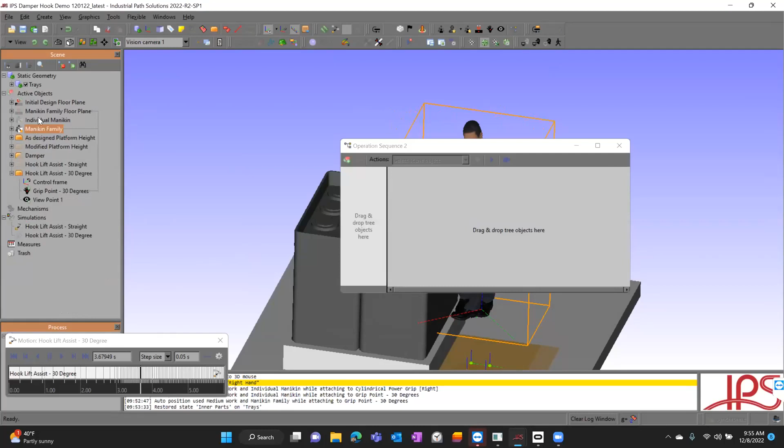The last thing that I'll say about IMA is that it doesn't simply need to evaluate these sort of static one-off single tasks. You are able to open what's called the operation sequence editor. And this is a really powerful tool that allows you to basically stack different tasks together. So you can start with a single mannequin, import some parts that have basically these motions applied to them, and then have your mannequins performing various tasks.

So if I want, say, a mannequin family, I'm just going to delete the individual mannequin. I'll bring my mannequin family in here. It applies a start state to them. I'm going to ask them to, if they're grasping any grip points, they should begin by releasing that grip point, and then grasp and follow the motion of that.

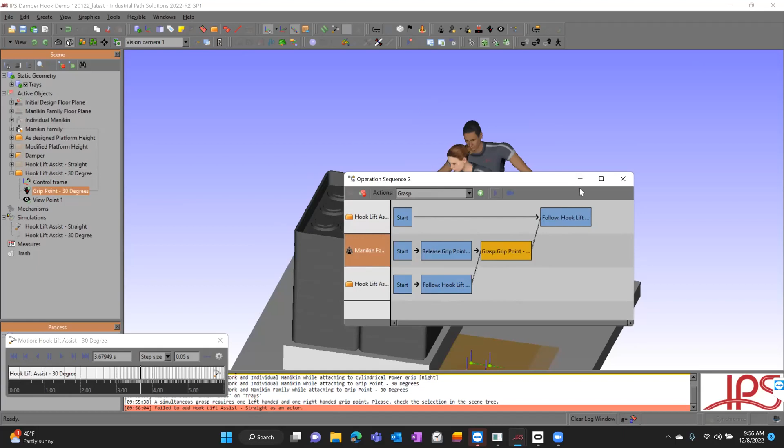You can then continue to add different objects and actors in the scene that, again, will continue to follow additional motion paths, and start stacking those together in a very linear timeline that allows you to, in a single click, press play, and it'll generate these series of complex motions where mannequins can be walking through the scene, grasp a part, follow a motion, release the part, assume a posture, grasp another part,

and you can stack these very complex series of motions together and end up with an ergonomic output that's representative of a much, much larger series of tasks. So it's useful for point in time assessments like this, where you can identify the worst case scenario, but also for stacking together certain elements of a process. And so with that, that concludes the IMA portion of this demo.

Thank you, Kyle. You've provided a lot of great information here, and we do have a couple of questions that have come in. You had shown an evaluation of the posture. The question is, are there other kinds of biomechanical analyses available within IMA?

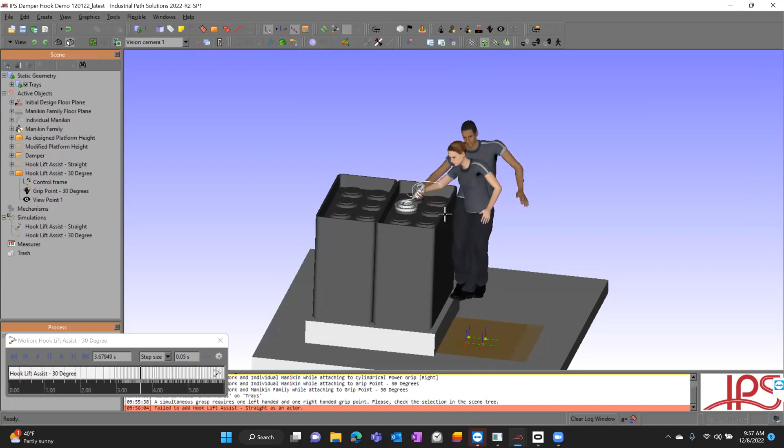Yeah. So at this point in time, the mannequin is primarily assessing the viewpoint, either for reach or for clearance. So much like the other tools, the distance measurements that John has shown, you can query distance measurements for hand clearance between mannequin geometry and surrounding parts. So reach, hand clearance, visibility, and posture, those are the primary ones.

We are working to implement in the future a biomechanical strength model. This is something that we expect to have in beta sometime in early 2023. But at this point in time, there is no lumbar compression analysis or shoulder analysis, but we are working to implement one of the more recently published shoulder strength models into this tool in 2023.

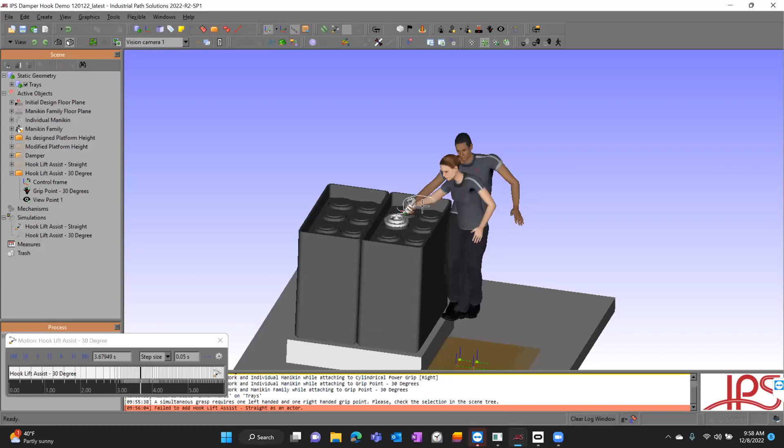Excellent. In the case of the tool example you're showing, does IMA take into account the weight of objects in this assessment if they were using a heavier tool? It's a really good question. Thanks for asking that. Yeah, so the tool itself doesn't necessarily carry any weight, but the grip points do.

So whenever you have a grip point in your scene, you have the ability to edit the grip point and add a mass to that object. So let's say we make this 10 kilograms. If you watch the mannequins carefully, they will adjust from a postural standpoint how they are approaching that task.

Again, because there is no strength model, there's no ability to extract whether or not they could successfully, from a strength perspective, complete the task. But again, applying a force or a weight to the grip point itself will allow them to change their posture, and that will also affect your basic RULA, your rapid upper limb ergonomic assessments, from the posture standpoint. So as they are adaptively changing to the new added weight, that may have an impact on your ergonomic outputs.

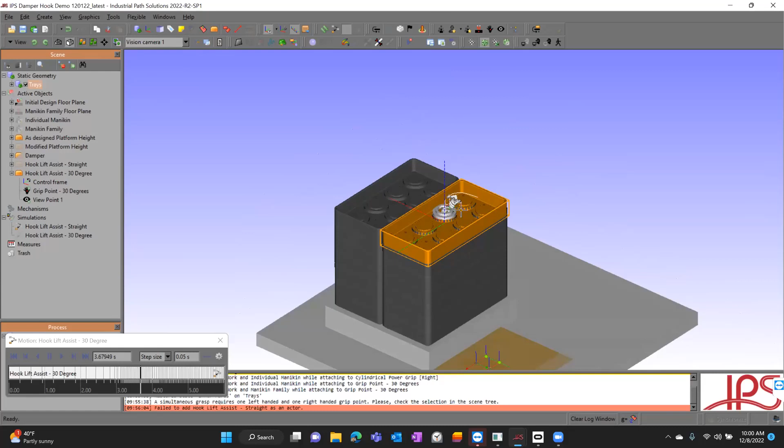Thanks, Kyle. What if you wanted to develop a situation where two of the mannequins needed to work together? Let's say to lift one of the dunnages. Is that possible? Yeah, absolutely. So the purpose of that would be twofold. One, to evaluate, again, from a posture standpoint, how a mannequin might approach a task, say this piece of dunnage was the task. One person could potentially lift it from the side here, but that might be a little bit awkward. So you could look at a two-person lift and put a mannequin on each side of this, each with a left hand and a right hand grip point.

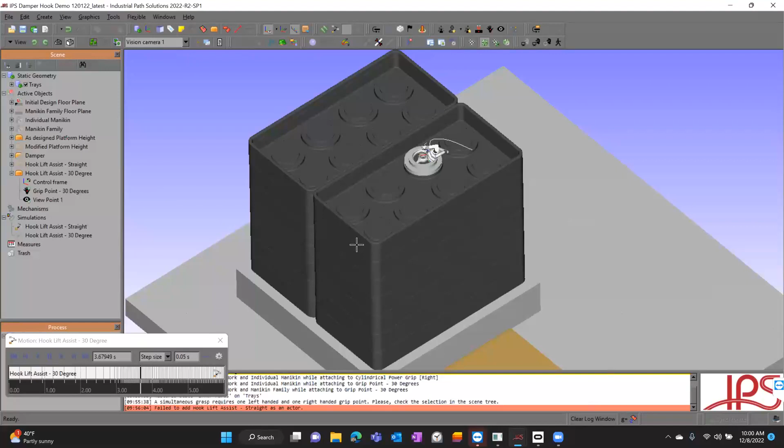And if you have the known weight of your object, you'd be able to edit the mass and reduce that significantly, assuming a homogeneous object and the weight's not shifting. What it would allow you to do is basically change the weight so that each manikin is sharing the load with the other. But again, those grip points would act in unison. So as the manikin performs the motion, say this object is moving from point A to point B, those manikins would lift that together. So you can have 2, 3, 4 multiple manikins all following the same motion and task.

And it's great that it really leads to being able to do a complete analysis of workstation operations and how an operation like this could work in concert.

Right. Oh, great. I'm not seeing any more. Oh, wait. Questions on the IMA side, so I'll let you continue and move over into virtual reality.

Great, thank you. Okay, so I'm going to go ahead and open up our scene that we have prepped for VR. And I might just take a brief pause here and tell you a little bit about how this is set up, just so that it's pretty clear. So you'll actually see my mouse. I won't touch my mouse, and if you see it move on the screen, that's actually John controlling my mouse remotely. And what makes the approach that IPS has taken towards VR unique is that it allows somebody to operate using a VR headset in unison with somebody directly, in real time, controlling the full desktop suite of IPS.

So this would probably be more likely done with 2 people interacting in the same room, say within a lab. Ultimately, I'm in Canada and John's in Colorado, so we've done this remotely. But what you'll see here is I'll be in my VR headset, and John will be operating the desktop controls while I'm interacting using the virtual reality controls. So hopefully we'll try our best to make this as clear as possible. But yeah, that's the situation that we have set up right now.

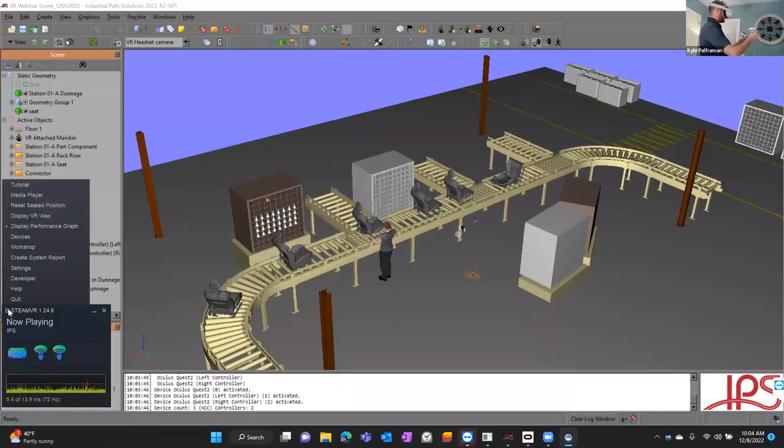So let's get this started. I'm going to put on my VR headset. And John, if you wouldn't mind putting me into the VR mode. Perfect. All right, that's great. So I'm just going to stand up for a minute. I will adjust my camera so that you guys can hopefully see everything that I'm going to be reaching to in the scene. Okay, so thanks, John. John, if you don't mind pulling up my VR view, let me know when you've done that so I can show everybody what I see.

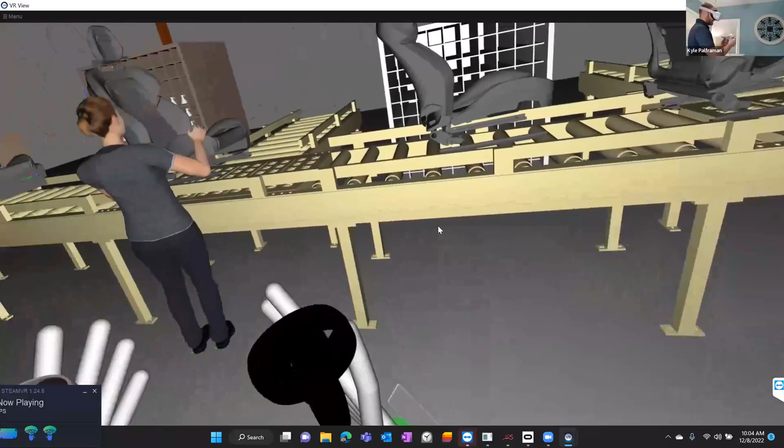I've got it. Awesome. So you'll see in real time, I'm actually fully wireless, so nothing is connecting me. I don't have any base stations or anything. It's all done through this headset, which is pretty unique. And what you can see is, I have some actions that I can do in here. I've got a pretty small subset of menu items that I can open and control what's going on in the scene. But really the use of this is that John has access to the complete desktop suite, and he can really help me along my VR journey while I'm in here.

So John, why don't you actually go ahead and take that manikin? Let's strap that to me so I can get a feel for what it looks like to be a little bit smaller. Sure. Just a moment. Just drag and drop the manikin onto you. All right. That's awesome. Thanks, John.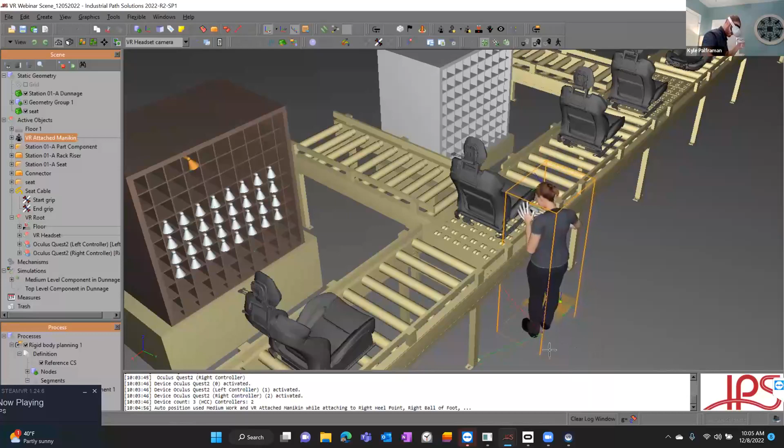So you'll see that I actually have full control over the mannequin. As I move, they are going to respond in real time. It's very fast. It's very accurate. So I'm going to actually go over to this seat here, and the mannequin's going to come catch up to me. So I can actually go ahead and put my hands out. I can reach over to this chair here, and I'll be able to get a good flavor for how far a mannequin can reach, while also ensuring that I'm not contacting this conveyor or anything like that.

And this will also work with all of the collision avoidance. So I can enable that as well. But for the purposes of this demo, I think it's pretty easy to get a flavor for what it feels like to be somebody who is a little bit smaller in stature than I am. So I'm actually going to go over here, and I'm going to attempt to pull that piece out of the rack there. It's pretty high, so you'll see that I actually have to reach quite far overhead and grasp that part.

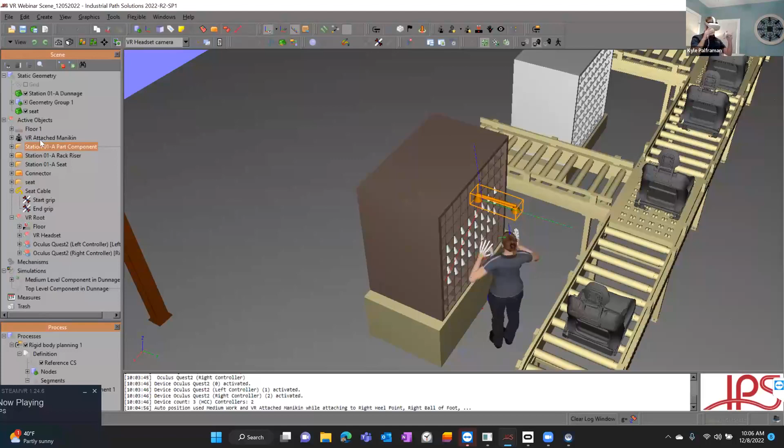So John, can you take the mannequin off me? It's a little bit distracting for a quick moment here. Sure. If you don't mind. Sure. Just de-render her. Perfect. Thank you.

Yeah. So John, this was really quite high. Do you think you could lower that? I'm going to grab this, and I think this height would be a much more appropriate height. Do you mind lowering the stock bin to that height for me? Yeah, absolutely. One moment. How's that? That looks good there. All right, I'm going to go give that a try, to see if I can put this piece back into the bin. 1 second.

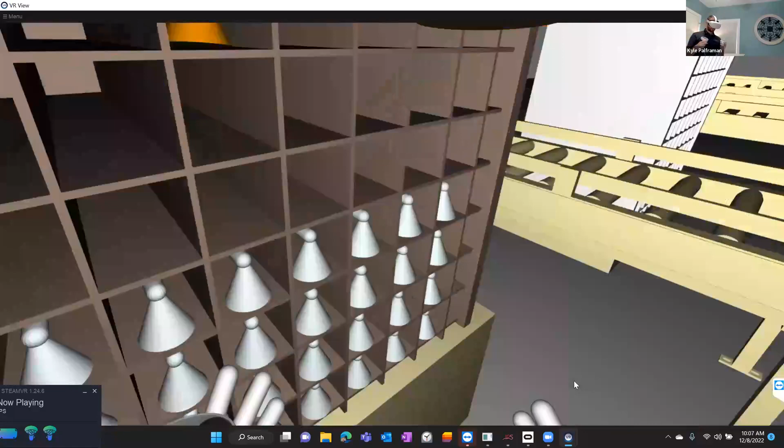There we go. And you'll actually notice that we have collision avoidance with the VR as well. So as I grasp this part, if I try to slide it into that bin, it's going to collide and respond. So you can imagine scenarios where you might have a part that needs to be installed in some tight quarters. You're going to get a good flavor for that, because it's going to bounce off any geometry that it really shouldn't pass through.

So John, what I'm going to do here is try to perform that task install. I know it's got to be installed to the seat there. So I'm going to go ahead and select record my motion. And I'm going to grasp it, and I'm going to pull it out. This looks like a two-handed install for me. So I'm going to turn around and place that into the seat there. That install looks good to me. So I'm going to go ahead and turn off that motion.

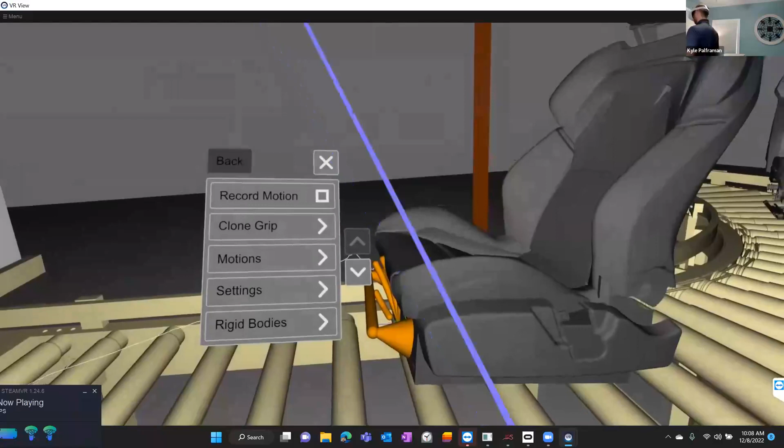And if I step back for a second, John, can you actually replay what I just did for me? Yeah, absolutely. See how that looks. Let me just get to a little better view here. And I'll set it to repeat. That's awesome.

Okay, and I can actually see my hand on there. And what's interesting about that is that grip point is exactly where I left my hand when I grabbed that part. And we can then use that grip point in the IMA function and apply another virtual human to that. So we get the digital human grasping the part as naturally as I did, the way that felt comfortable to me while I was in VR.

And they would then be able to follow this exact motion path. The other thing that's really interesting about this is that the actual timing that it took me to perform this task is accurate in this motion. And so this could be something that's really interesting to, say, industrial engineers, to really make sure that people are able to perform the task at a specific or a given rate, so that they can keep up.

So that's good, John. Do you want to stop that motion for a second? I'm going to go hop over and showcase the cable. All right. Yeah, absolutely. I'm going to hop around the scene here. And then, John, let me know when you've come and found me. Sure. Yeah, just 1 second. Let me make sure we've got a good view.

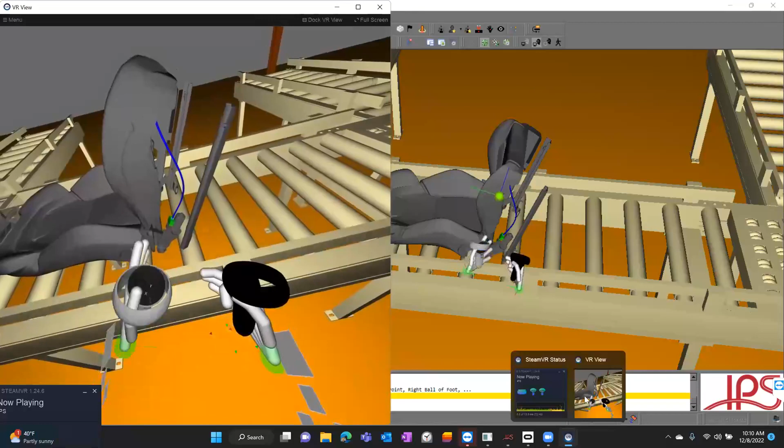And then I'll actually try to... 1 second, Kyle. I'm just trying to get the VR view and the IPS view. Great. Yeah, this would be a good one to see through my eyes. Together. And then let me just make this a little smaller. Okay. So now we can see IPS as well as the desktop client, as well as Kyle's view at the same time. Awesome. Yeah, so I know that this will be my task that I need to complete.

So I'm going to go ahead and actually grasp that part, pull it out a little bit. You can see that as I pick up this part, the cable is actually going to respond dynamically. We've actually got collision avoidance turned on. So basically this cable is going to crash into the seat and it's not going to translate through it.

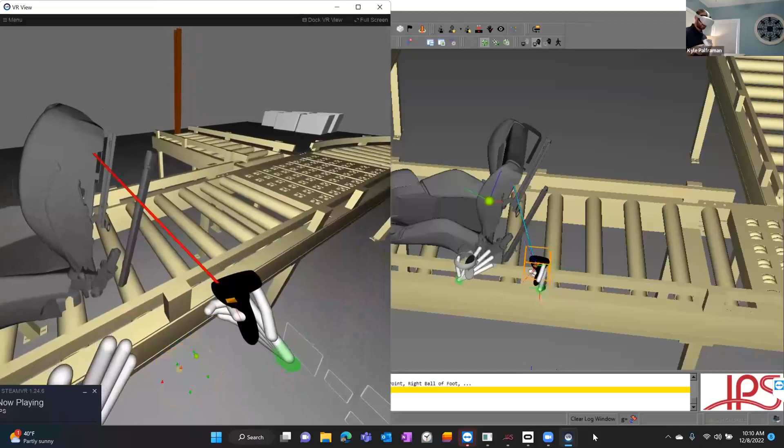Also, what's really interesting is that if I apply any tension on this cable, it'll apply the same visualizers that John's got on earlier. So I'll be able to see whether that's torsion, if it's strain, if it's violating minimum bending radius, if it's violating some total force or tension in the cable. I'll be able to see that happen in real time as I apply any tension. So John, maybe jump over to the desktop so they can see what it looks like if I accidentally perform this assembly incorrectly. Sure.

So see, if I grab this part and I accidentally try to wrap this around the wrong way, you'll actually see that it starts to collide. It starts to maybe display those red colors, giving me a pretty clear indication that's not the right assembly path. So what I'm going to do is I'm going to grasp it and I'm going to apply it the correct assembly path. But to me, this might be a concern. This is a pretty tight area for me to get my hand in.

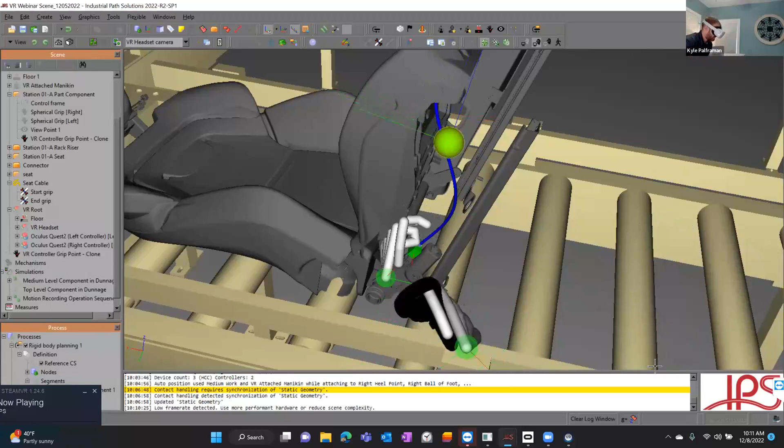So what I'm going to do is I'm just going to put my hand in. Oh, sure. Sorry, there we go. Back to a better view. No problem. You can just see that my left hand here, if I go to grasp that part, it's pretty tight for hand clearance. So what I'm going to do is I'm going to leave a grip point for myself. And I'm going to go ahead and take that back into my IMA module in a little bit. And I'm just going to take a look at how much clearance I've got between this seat and that part there. But yeah, that looks great. And that concludes the VR portion of the demo.

Great, thank you, Kyle. You just touched on a couple of questions that we had, which was whether you can record the VR session and then use it back in IMA to do the ergonomic analysis. Exactly. Yeah. So I'll just reiterate. So when you're in the VR, you have the ability to select record motion. And when you do that, any parts that you pick up and move through the scene are tracked in real time.

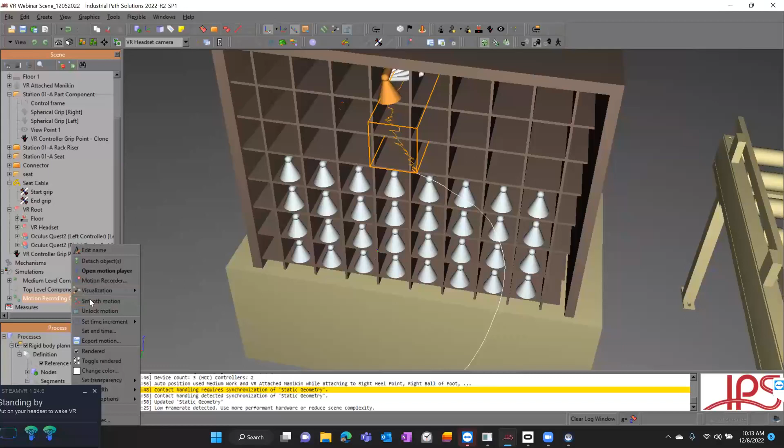And again, you can see that just due to the nature of artifacting, there is some choppiness to this, but we would be able to smooth that just like every other motion that comes from the path planner and things like that. So the raw motion data might be a little bit choppy. After John puts it through 10 or 20 cycles of a quick smoothing, you'll see that data be nice and filtered. And then you can use that for training elements or whatever it may be. But it is really useful to be able to play back in real time exactly what you performed while you were in the VR setup.

Excellent. And then likewise, so that's the IMA to VR connection. In the case of the cable, if you found that perhaps extending the length of the cable would be of use, do you have access to the cable simulation functions from VR? I do, yeah. So in those menus that I was able to show, there's some, we'll say, limited functionality that's available to the VR user.

But I almost see that as a strength because I've seen other VR tools with far too many capabilities that they try to allow you to access in VR. So you're sort of menu diving, right? It's very difficult to create a nice user interface for VR use. So I think what's really nice and unique about this implementation is that somebody could be on the back end, again, using the full powerhouse suite of the desktop version of IPS, and they have a lot more access and control over features. But basic things like segment length changing, I can do that while I'm in the VR headset. Yeah.

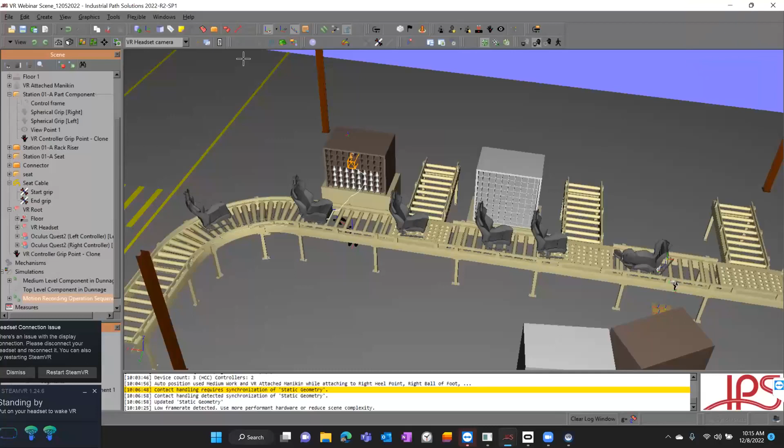Great, great. Thanks for that. And yeah, with that, I think I was going to go to a closing slide on my side, just kind of showing the world of possibilities that we have in our IPS industrial path solution simulation environment. A question also that came over, and I'll pose this to John, is the types of interfaces to CAD PLM systems that are supported, since the working together in a process workflow is quite important.

Yeah, absolutely. Great question. So there is an out-of-the-box direct connection between PTC Creo View and IPS. And we've actually seen some clients use this very successfully, right? So it's a one-click integration. Essentially, if you can open up a piece of product or tooling in Creo View, you click one button and it sends it directly into the IPS tool. We have also seen some direct connections between Siemens Teamcenter and IPS, so we know that those connections can be established as well.

Excellent, excellent. Well, I appreciate you guys demonstrating the power of the IPS tools. I think we completed the workflow that we'd set out to, looking at cable simulation to path planning to ergonomics with IMA, and making the entire thing accessible in virtual reality.

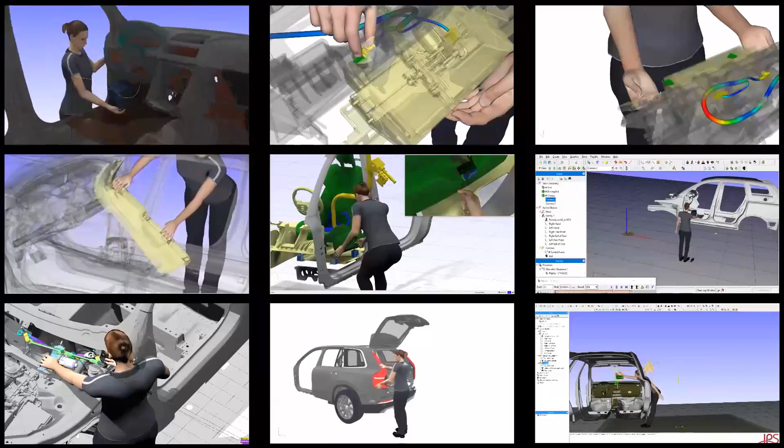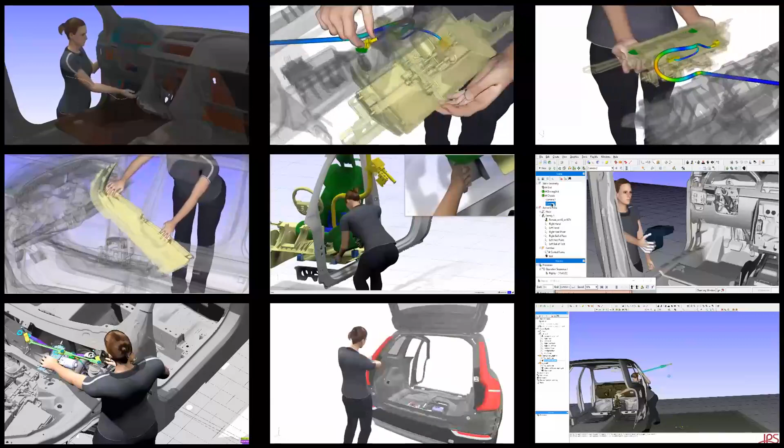There's a strong movement afoot to go to 100% virtual validation for product development and assembly manufacture that we're seeing throughout the transportation sector, and it's only made more challenging by the increased complexity of vehicles and the systems building them. So we'd be excited and honored to work together with you.